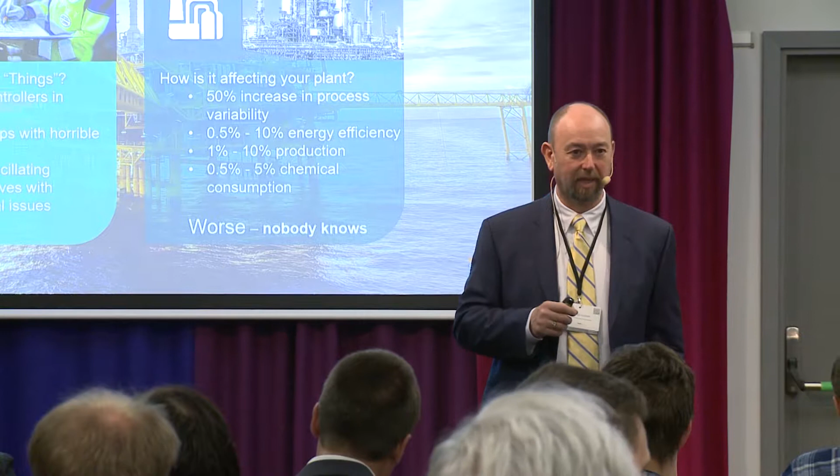What we found is this. The things in our industrial Internet of Things were pretty bad. Typically, about 30% of the controllers in a plant are operating in manual mode. That's quite shocking. Imagine going to the door of the aircraft, talking with the captain, and saying, how much of the plane will you be flying on manual today? And he says 30%. You really have to think twice about whether you're going to step into the plane.

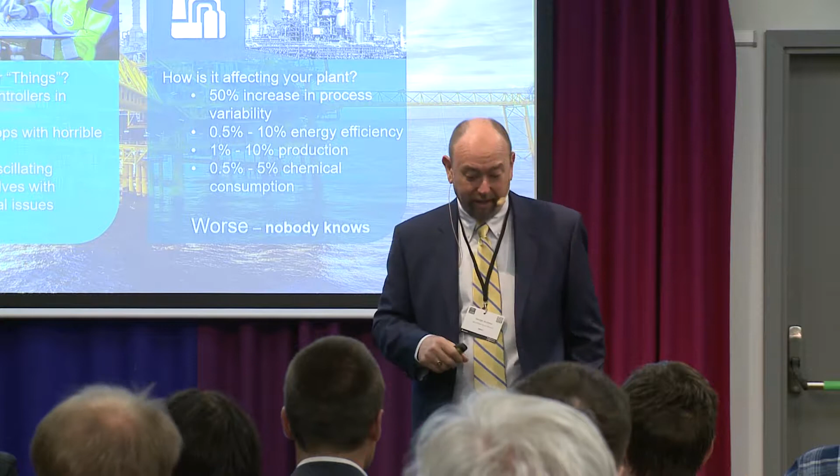You know, which 30%? The fuel flow? The hydraulic pressure? Which part are you going to be adjusting while you're trying to land the plane? So that's quite concerning. In an oil refinery, typically that's not the problem. That's the symptom. It's a symptom. Controllers are put in manual for a reason. Usually the reason is something else is not working properly, right?

So if the temperature of the room is not working properly, what do the manual controls do? We turn off the thermostat and we open the door, right? That's in manual. It's in manual, but why is it in manual? Well, because something wasn't working properly. 30% of the controllers have horrible tuning.

So tuning is telling the controller how fast, how much do you need to react to take control of the process. So for example, the tuning of the temperature in this room, if we had really strong, aggressive tuning, the air would come on full bore, cool the room down, but maybe a little too much, and then it'll have to warm it up a little bit, and then cool it, and warm it up.

Really, I think about this like trying to teach, how many people have ever had to teach someone how to drive a car? Right? Yeah, okay. So sometimes you're teaching a teenager to drive the car. Sometimes they're controlling a little too much. Sometimes not quite enough, and they're drifting off to one side or another. So the tuning is getting that balance right. How much action do you need to take to get the process back under control? What we found is about 30% of controllers had absolutely horrible tuning.

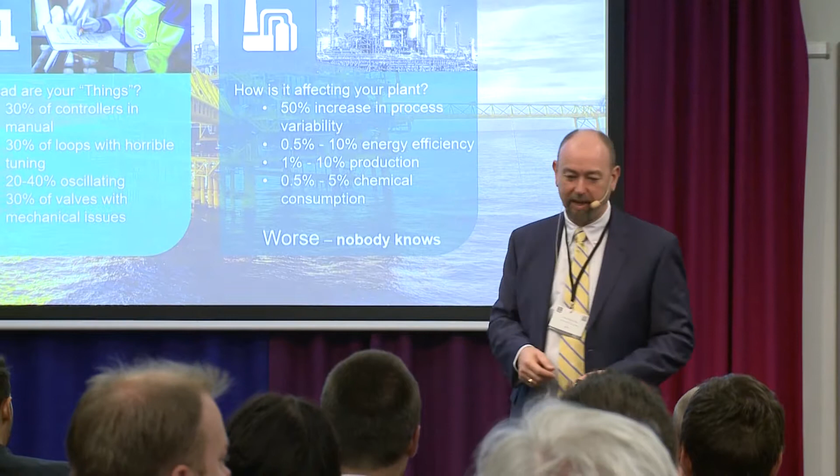Horrible tuning. In fact, about 10% of controllers we found out in plants still had default values in there that were put in by the control system manufacturer. It's quite surprising. It's quite a big number. And you wonder why 30% is running in manual. 20 to 40% of the plant is oscillating. It's wandering, just like this.

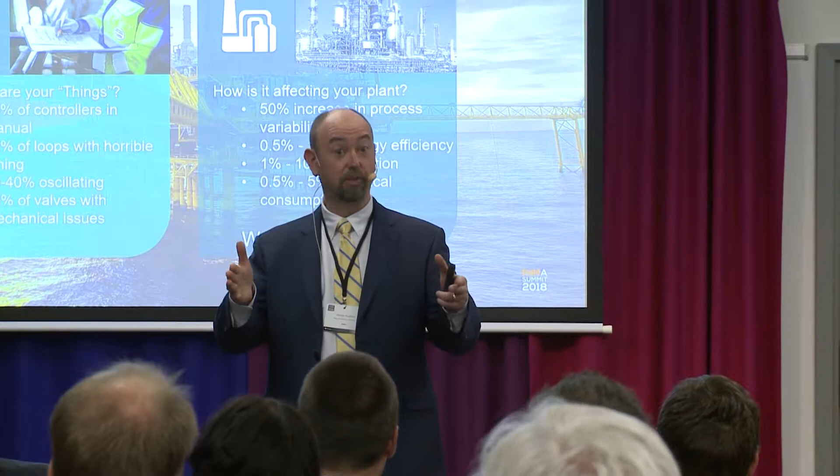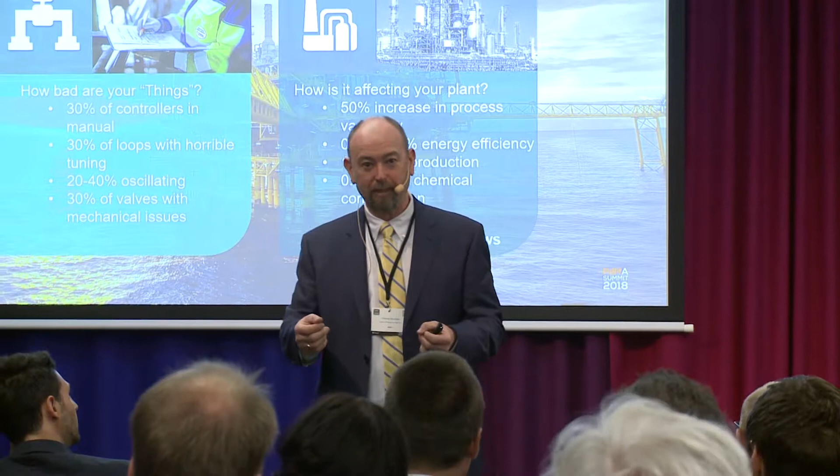So imagine, you can think of this like the car as well. If the car is going down the road like this, if you're staying in between the lines, everything's okay, right? Are you okay with that? If the average value, that is, I'm staying in the middle of the lane, is okay, is it all right that I'm wandering like this? Is it efficient? What do you think? No, not so efficient. Is it safe? Is it causing some reliability problems for the car? Am I wearing the car faster?

Yeah. Same thing if I had the cruise control on, and the cruise control, instead of holding steady at a constant speed, was going up and then down and then up and then down. Well, you know, I'm sorry, officer, but on average, I was under the speed limit. Is that going to work? Probably not. Right, so same kind of thing.

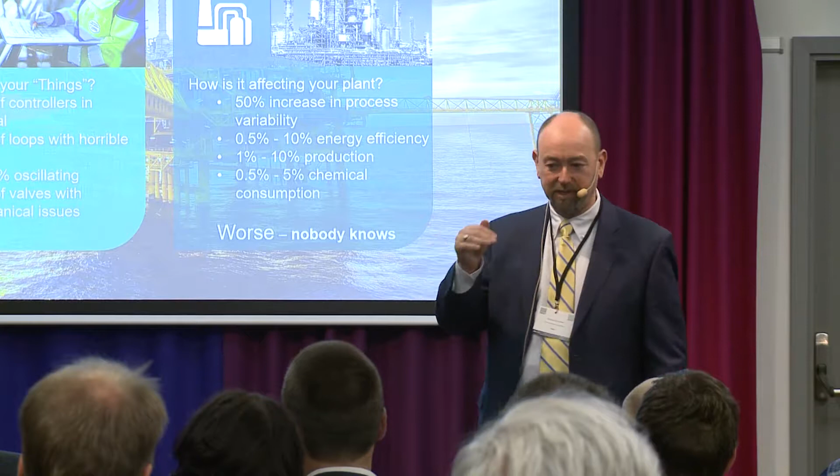So we have this oscillating problem in plants, and then we also have some mechanical problems around the control valves. Typically about 30% of the control valves have some mechanical issue. It's too big, it's too small, it has mechanical stiction or looseness in the valve. So you can think about that, for example, if a control valve is too small. But also, this is good, right?

Uh-oh, we're getting a little bleed through.

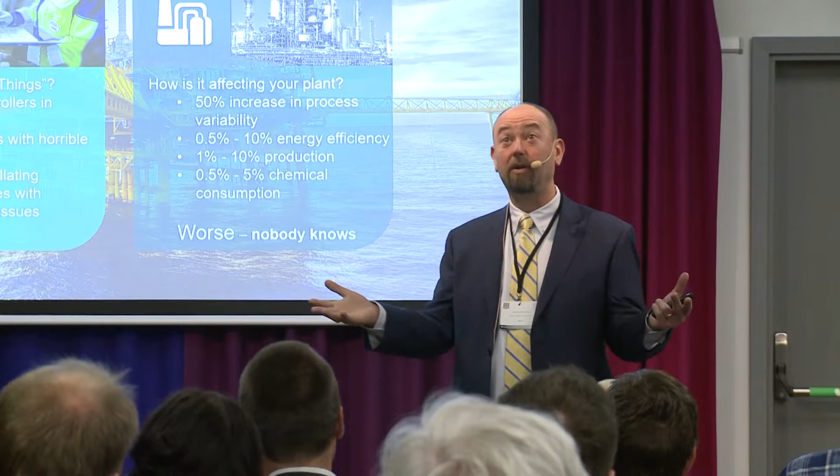If the control valve is too small, what will happen? Like, let's say we're trying to make this room cooler, and there's a valve with some cooling water going through it, trying to make this room cooler. But the valve is too small. What will happen? The controller will keep telling that valve to open. Open some more. Open some more. Open some more. And eventually, that valve is fully open. It's putting as much cooling water as it can into the coils to cool this room.

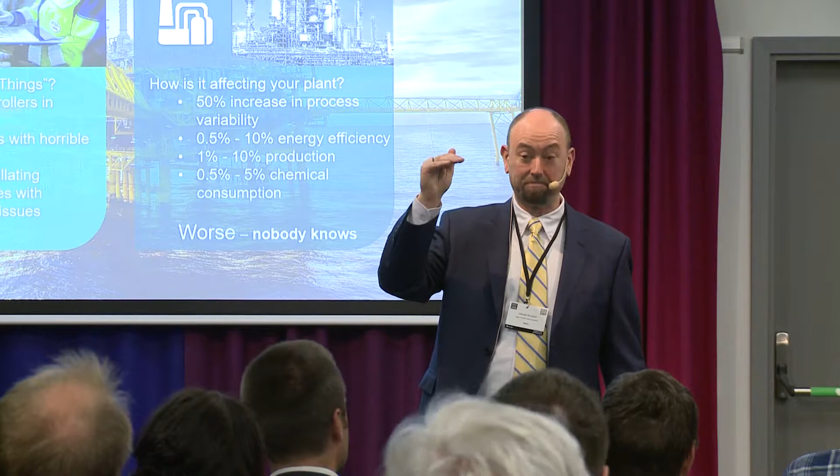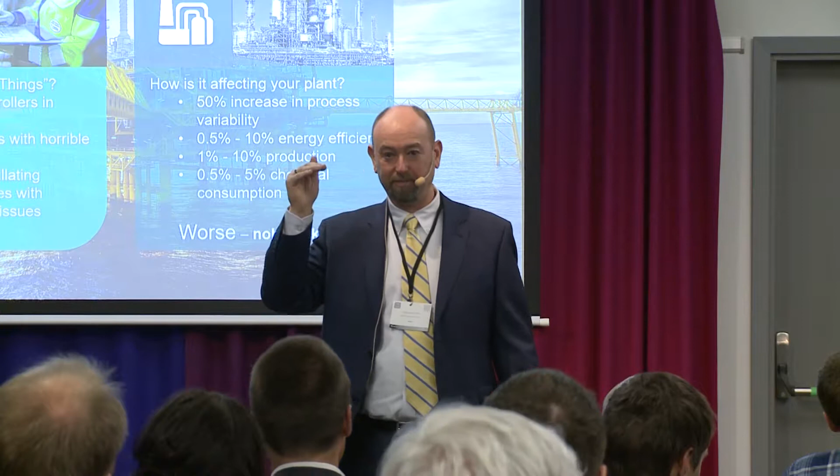And then what? Still not cold enough in here. So what happens? Nothing happens. Nothing more can happen. The valve's already 100% open. That's all it can do. So what happens is now we have no control. Okay? We just have to live with whatever temperature it is. We're at the limits of what the plant can do. We have no control over the process. Okay. If the valve is too big, we have other problems to make it hard to control. What does that mean to the plant?

Well, it means that in the plant, we wind up increasing the variability of the process. If you have these control problems, you will increase the variability in the process. That's a real problem for somebody like me who's been for 30 years trying to improve control in process facilities. Why? What is the job of the process controls in a plant? What's the purpose? Why do you even have a control system? Why not just put in everything without valves and instruments and just let it run?

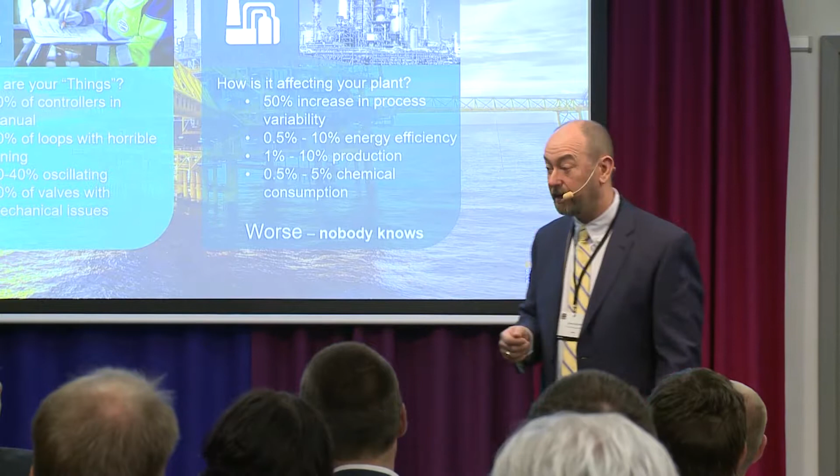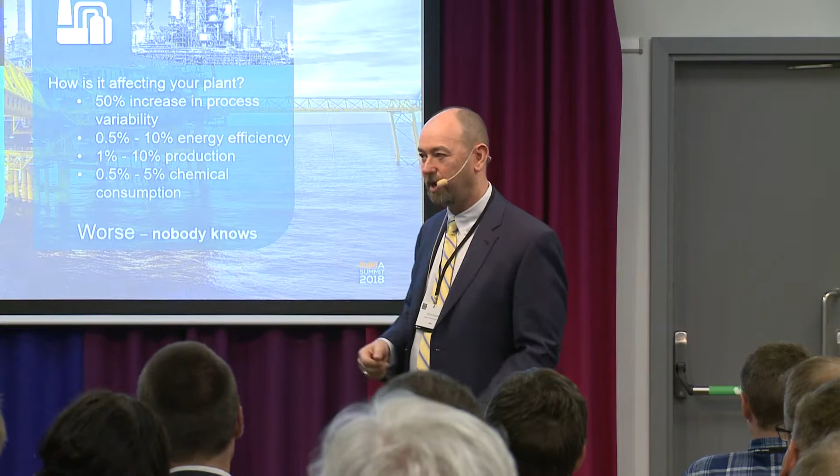What's the purpose of a control system? It's to reduce the variability, to stabilize the plant and to reduce the variability. And yet, this number's not on this slide. 75% of controllers in plants do not reduce the variability of the plant because they have some of these problems. So we're operating in a very target-rich environment, okay? Which means there's a lot of places we can make improvements.

The problem is, even though we've been collecting this data for all these years, most plants have not been doing the analytics to understand where the opportunity is. If you walk into most plants in the world, nobody knows how much of your plant is operating in manual today. How many of your valves are too small? How many of your instruments are saturated? Saturated instrument means like your speedometer on your car is pegged. You're driving so fast that it's at the limit. And again, once you're at that point, now you don't know how fast you're going. Okay.

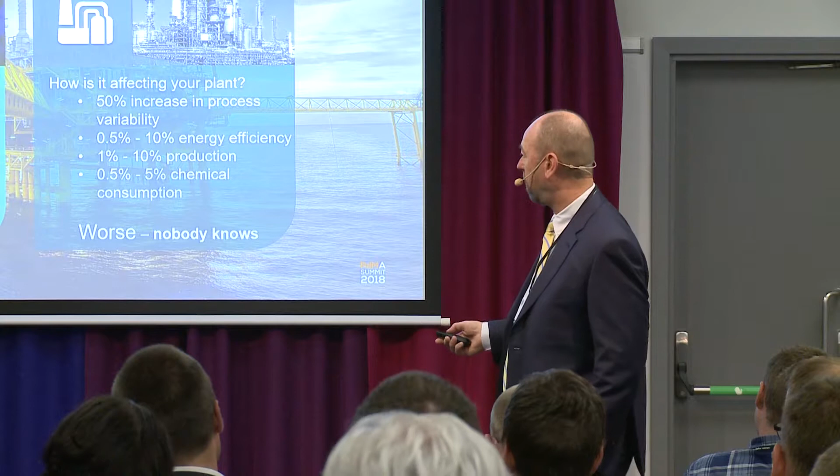So there are opportunities to improve the performance of the plant if we pay attention to those analytics, and especially, I'll get to in a minute, if we prioritize. Because if 30% of the plant is in manual, that's a lot. It's going to be very, very hard to deal with all of those.

Okay. A little bit about the cloud. I talked about this before. So a typical IoT application, like a Fitbit, I have a device, it's connected somehow to the cloud, and in the cloud then I can do some kind of analytics. And I can also, from my cell phone, make adjustments to the settings on my Fitbit so that I can put my preferred settings, make it be larger text so I can see it these days, do all of that kind of thing from the cloud. In the industrial world, we have some smart devices, but here we start to run into problems. The nasty cybersecurity concern again.

Most of these plants are really concerned, terrified, in fact, about making a connection between a field-connected device that somehow, some way, is connected up to the cloud. They might be okay about the data from that device getting to the cloud, but they're very, very concerned about there being a connection that allows somebody, somewhere, to come down to that device and make a change to it. Okay? Rightfully so. We don't want these plants to start blowing up around the world.

And there are many agents around the world who are intentionally trying to hack into these control systems and take control over them and make some change happen. In a lot of cases, those are our own governments doing that, and in other cases, it's other actors doing that. So there's a real concern here about doing this.

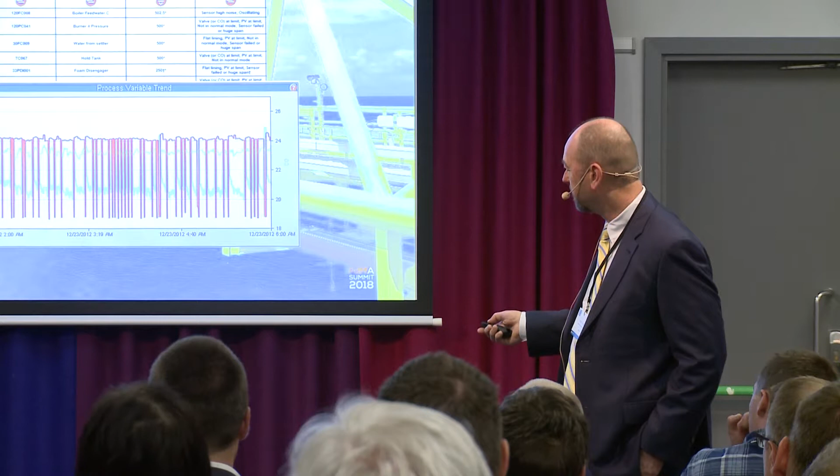So this is a trend showing a flow measurement. This is a flow meter, and it's hard to read the scale from where you are probably, but this is something like 600 gallons per minute on average up here. The blue is the valve position, and the red is the flow. So what's going on with this flow?

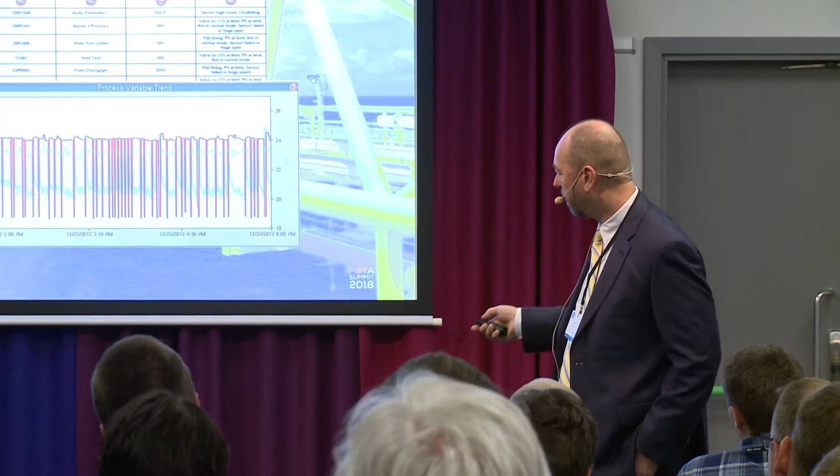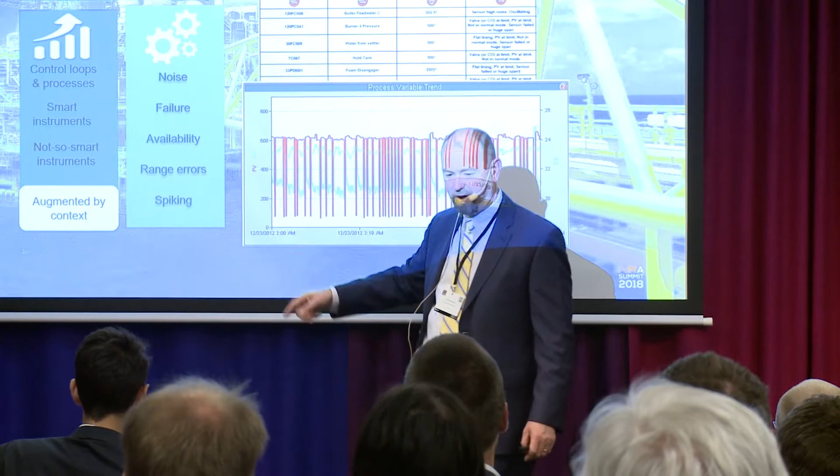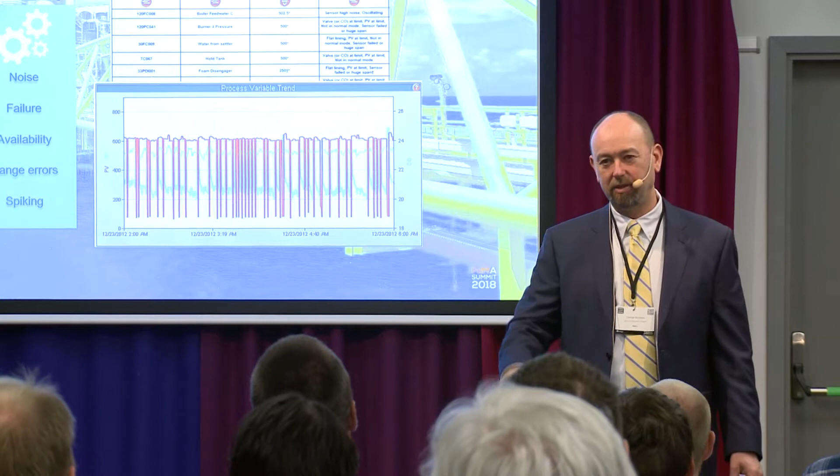It's running along at about 600 gallons per minute, and then it drops down to about 100 for about a second, and then it goes back up. And then it keeps measuring along, and then it drops down to about 100, and then it goes right back up after 1 second. So what's going on?

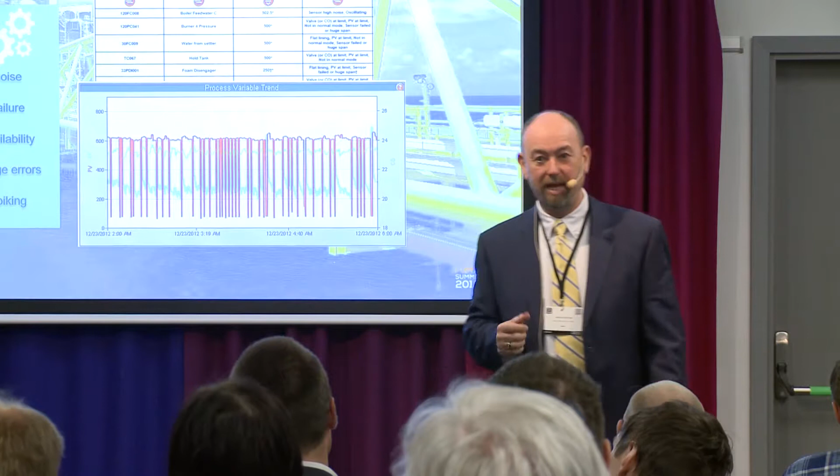Is the flow in the plant really going from 600 gallons a minute down to 100 gallons per minute for 1 second and then popping back up? No, you can't get the flow to stop that quickly. So what's happening? The instrument's failing. Okay, the instrument's failing. This is a failure mode of a typical magnetic flow meter.

It's one type of flow meter that over time, the lining on the meter starts to fail. As the lining starts to fail or develop bubbles, you'll get a spike in the measurement. It'll just drop out, just for 1 second. Sometimes it goes to 0, sometimes to a low number. It just drops out. And then over time, as it gets closer to failure, this happens more and more often.

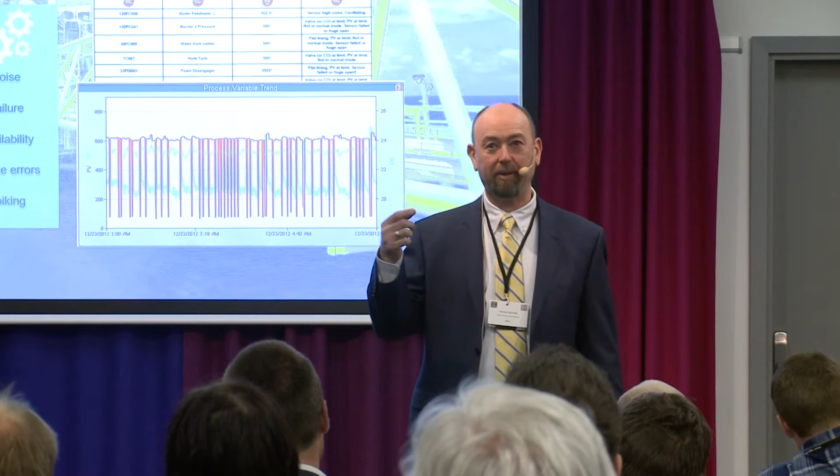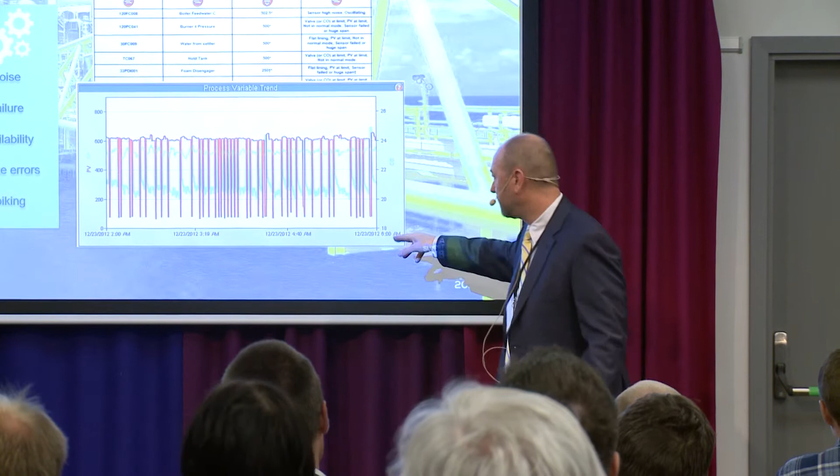So what happens at first is the operator will get a low flow alarm. We'll say the flow stopped. And then they'll go look at it, and they'll say, no it didn't stop, it's still at 600 gallons a minute. But you see this pattern. So this is telling us that an instrument is failing, and we can predict that a mag flow meter is going to fail when we see that.

I'm going to get through these slides quickly here. I'll move on to another one. This one is showing us a different kind of problem. So here's a flow going through a valve, this red line again. And here's the valve position. So what's happening here is the valve is sticking.

The valve is trying to move. It's being told to move. Nothing happens. Move. It doesn't move. Move again. Doesn't move. Move again. Still not moving. Move. And it moved. Now it's unstuck. And then it's told to go the other way because it went too far. Move. Doesn't move. Doesn't move. Doesn't move. Finally it moves.

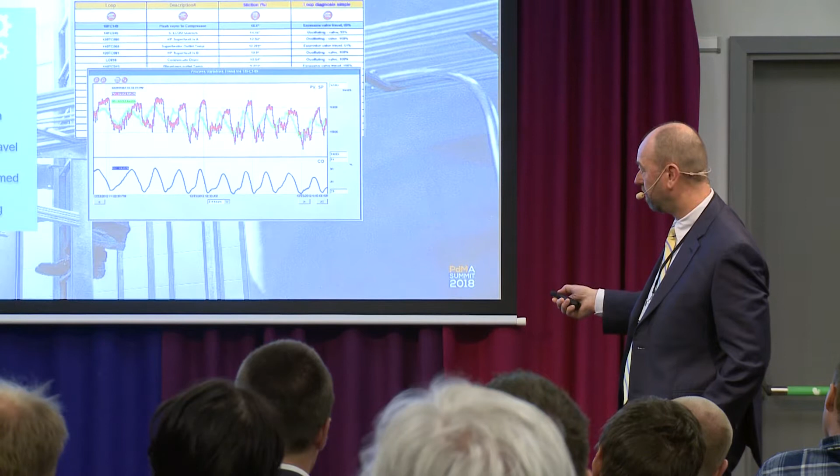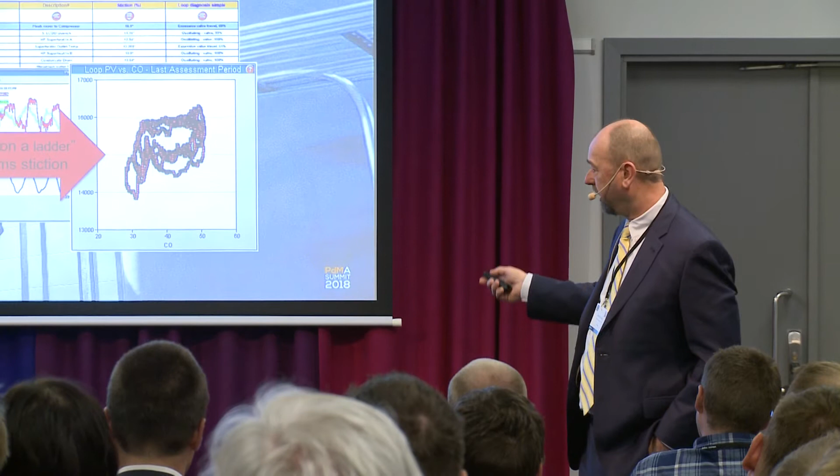So the pattern that we see here, we can apply some analysis to find out what's going on. When we see this kind of square-shaped pattern on the red, that's the flow, and this shark fin pattern on the blue, the commanded valve position, we know right away that's a sticky valve. I can tell you with about 99% certainty that's a sticky valve. And I can confirm that further by plotting this process variable versus the control output and seeing this characteristic pattern we call steps on a ladder.

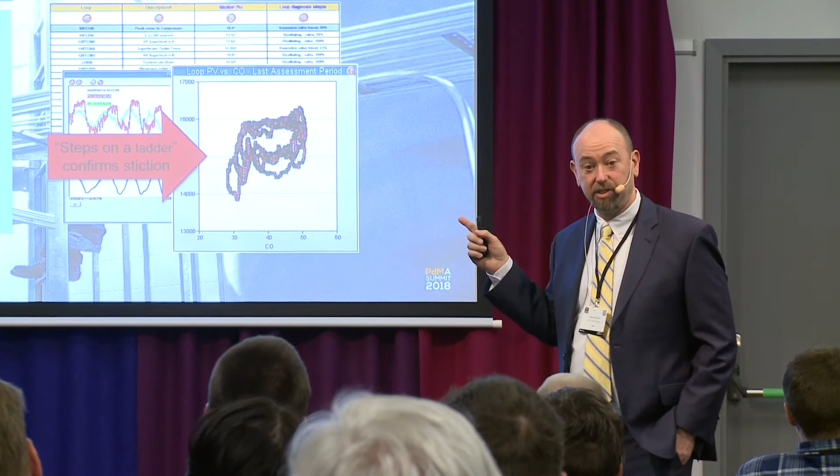So this is another type of predictive analysis, well actually it's not even really predictive, it's telling us we have this problem right now in the plant and we need to go solve it and fix it. So the analytics are going to tell us an awful lot about where we have problems, what kind of problems we have. I can do about 80 types of analytics now on control loops. The challenge then becomes, just as was mentioned in the last presentation, the ticketing and the follow-up and the service that's required to get these things fixed.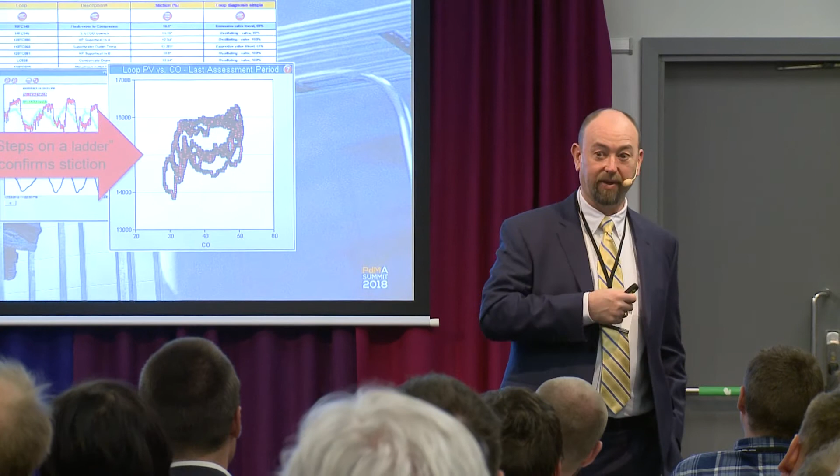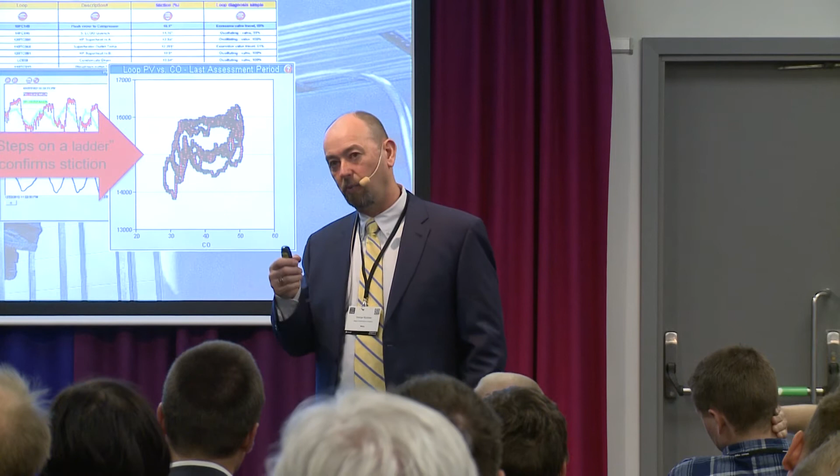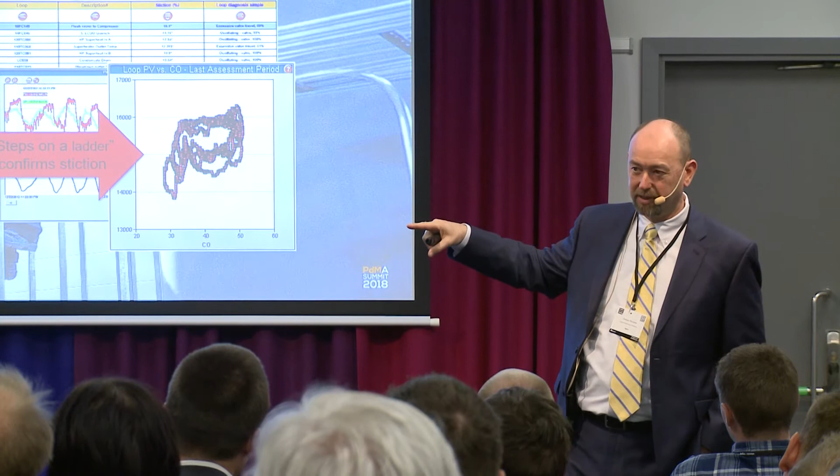You simply don't have time to fix everything. In an oil refinery with 3,000 control loops, you're going to have about 900 things that need to be fixed. Which 5 can we work on this week? That's the real question. Prioritization, merging economic information with this kind of technical information is critically important to get us to that point.

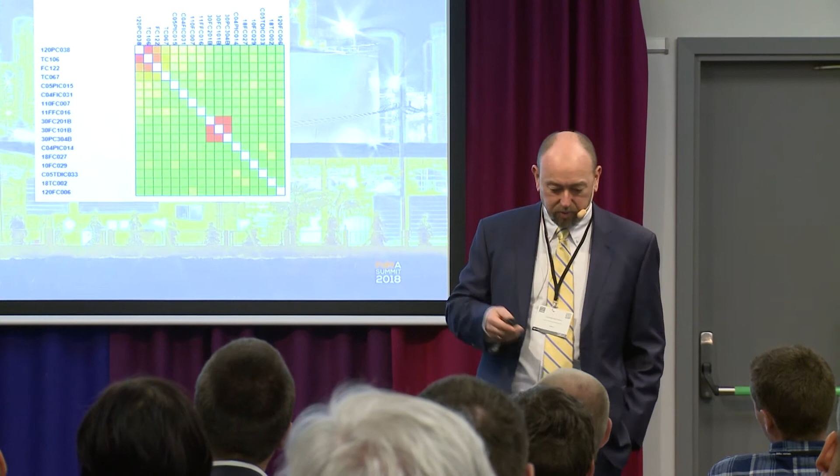If we take analytics a step further, one of the other things we can do is look not just at each individual controller, but if we start thinking in a big data sense, we start looking for interactions between controllers in a process plant. Again, the earlier presenter talked about these process plants being very complex environments where a change in one area has a ripple effect and carries on throughout the plant.

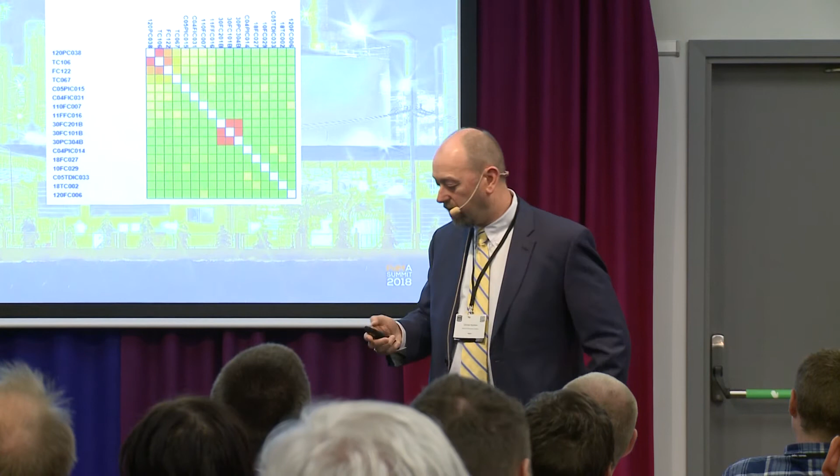So if you think about the steam production in a boiler in the utilities area of a plant, that affects every single part of the plant that uses steam. If the steam temperature goes up and down, then everything else in the plant that uses steam is going to follow that pattern. So if we apply some big data approaches to this, what we can do is look for the root cause of upsets in the plant.

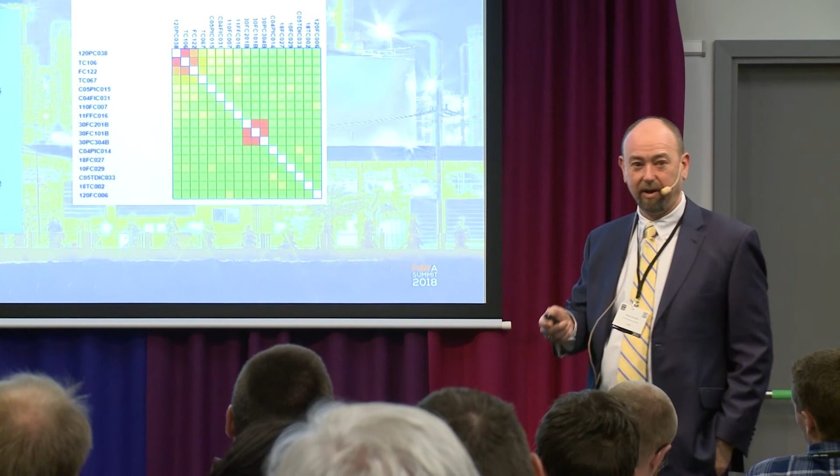And the way we do that is like what we used to do in the old days. We used to take out paper strip charts of temperatures and pressures and flows and lay them on the table, look for similar patterns, put them together, hold them up to the light and shift the pages. Well now we do that kind of thing electronically to find the root cause of where things are. Very often in a plant, the root cause of a problem may actually be half a kilometer away in another part of the plant.

So it's been a really interesting learning process as we've gone through that. And I'd be happy to talk to people about examples of that as well.